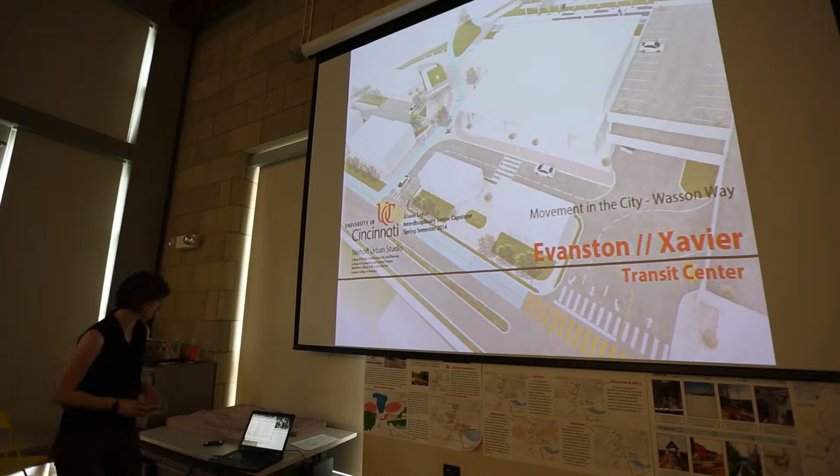So the first diagrams are just the context, which we've already pretty much gone over, but we're in the farthest west portion of Wasson Way, right next to Xavier, north of 71.

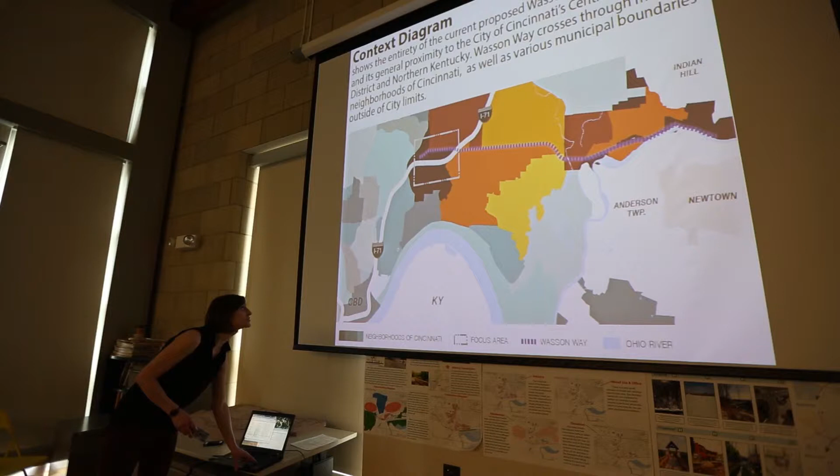Zooming in, Wasson Way's rail corridor actually also intersects with another rail corridor that runs north-south and along Dana Avenue, intersecting with Montgomery.

As far as the framework, this shows again the site we've already heard presentations on, and then the site I'm focusing on. This shows our collective ideas on where the transit center and stations should be placed, with a stop here to the eastern end, and also at the intersection of Wasson Way and the other rail corridor, which is also the proposed I-71 light rail project.

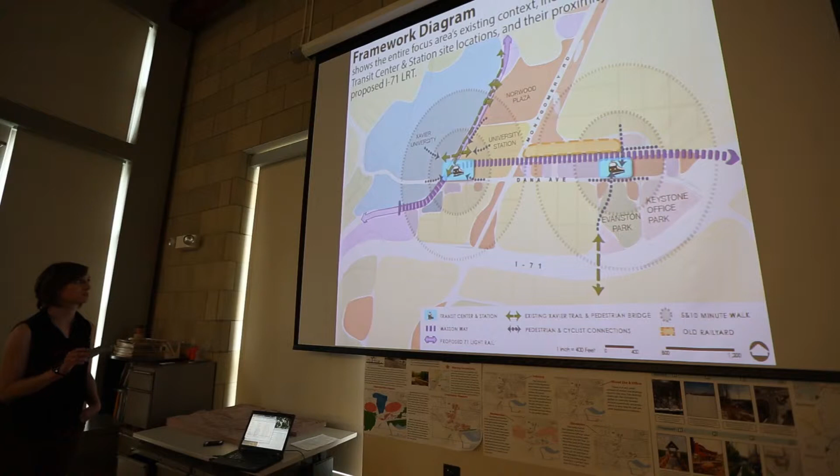Currently on the site, Xavier has built trails that serve as a feeder to the site, along with Dana Avenue directly to the south. The site is bordered by University Station, a mixed-use development currently under construction, and I'll give more details on that. Xavier University borders it on the other side.

This is an existing conditions map, more zoomed in on the proposed site. As you can see, again, Xavier and the trails border the left of the site, along with University Station.

This is the full build-out plan that's currently in just phase 1 of construction. Directly next to the site is a planned office development with below-grade parking, structured parking, and a Xavier Recreation Center to the north. Also showing in this map are the existing bus lines.

The BRT is planned, already running through Montgomery north-south, as well as some of the more major bus lines. The thicker and darker the line, the more frequently the bus comes and the more popular it is.

So you can see the 4 and 51, and then also the buses that run east-west to the south of the site. One of the main bus stops is right here on the corner of Montgomery and Dana, which is a 10-minute walk, but again the BRT would only run through here.

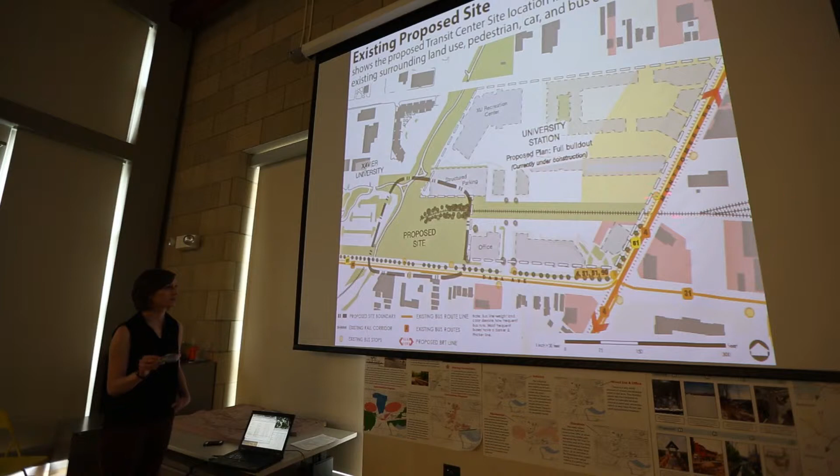And then as you can see, the existing Wasson Way is just the old rail corridor.

As far as some of the precedents before we get into the design, I wanted to focus on utilizing the site to actually incorporate transit, bikes, and pedestrians in a plaza, to create more of a vibrant mixed-use space outside of the actual land uses that will be located there.

This is a picture of, both of these pictures are from Portland's Transit Mall, specifically Urban Plaza, which, as you can see, has light rail running directly through the site and directly into the pedestrian area.

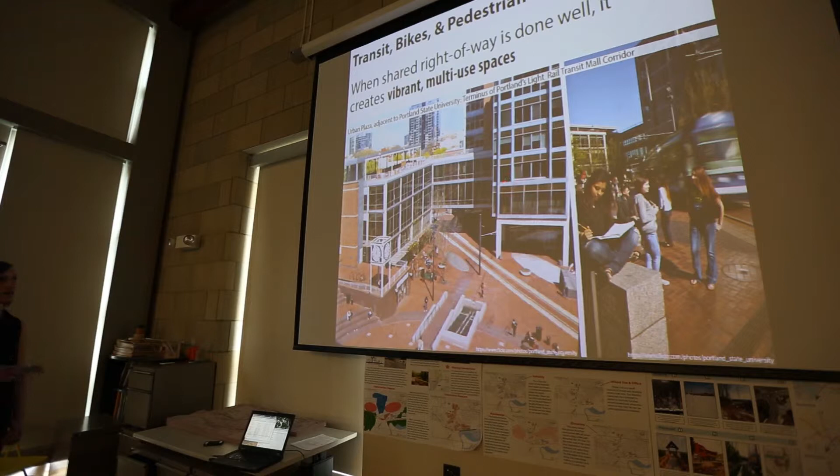These are stepped seating and a waterway, and actually mixed use, some ground floor retail, and Portland State University facilities above, as it borders a campus as well.

And I'll show more photos of this, but as you can see, the pedestrians are pretty much just right in the mix of the transit.

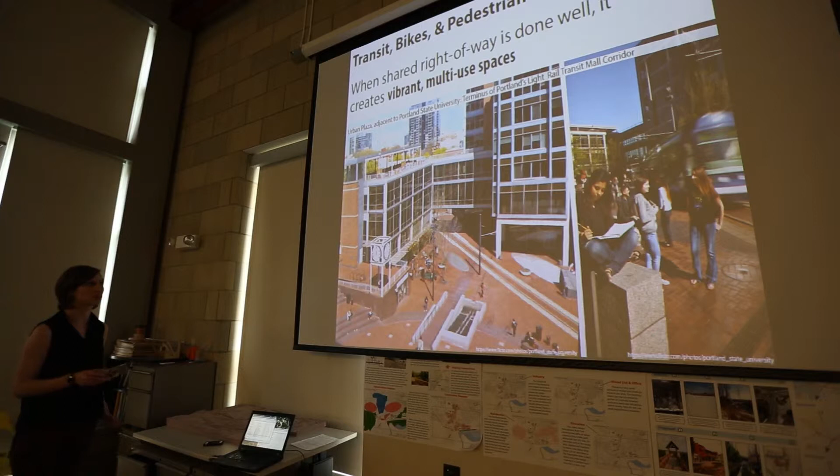These are more pictures of Portland. This is their transit corridor. As you can see, again, the light rail is right there. Low floor trains, you can step right on and off into the public space.

People kind of just cross at will, and a lot of times the paving is the only thing marking the different uses in the space, but everyone is sharing it. Bikes and pedestrians cross the tracks.

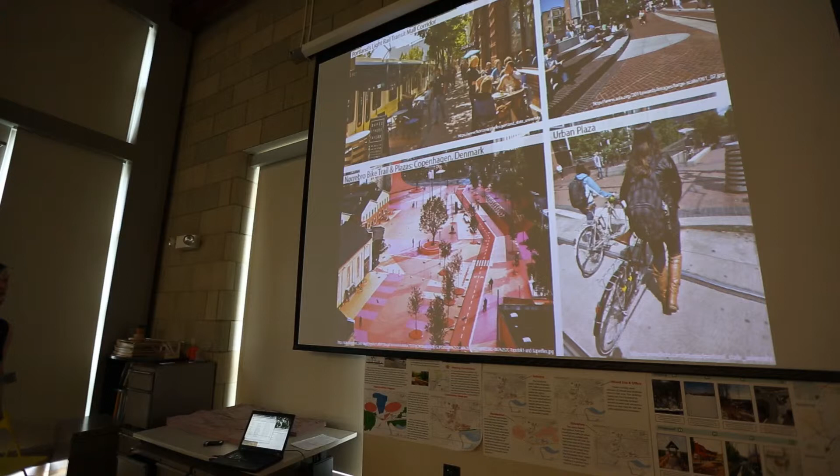And I also included this plaza and bike trail that is part of a series of plaza bike trails that span quite a way in Denmark. Again, pedestrians, bikes, all mixed in, creating a more interesting space rather than segregating all of the uses.

And then I was also wanting to look at the ways in which you support these different uses within the same space, creating opportunities to not only support the transit use and bike use, but also the services that would go along with that.

And a lot of the spaces, including Urban Plaza, actually include bike garages, bike shops, bike shares, all of that.

And then, for the people that aren't using the light rail or the bike facilities, what would make them want to come and stay in these public spaces that are interesting with elements of green? As you can see, Urban Plaza, while it's a great example, is a little outdated as far as a lot of paving material, not as much green.

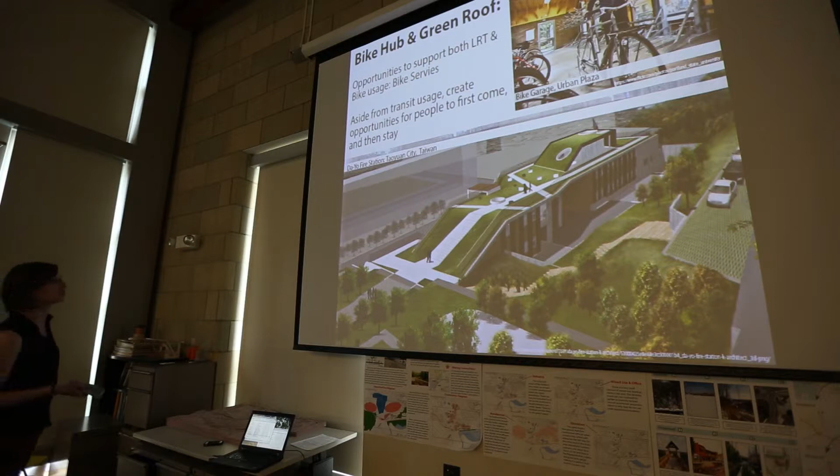I really wanted to incorporate both paving and landscaping with some green elements. This is a case study in Taiwan of a sloped green roof.

As far as the proposed plan, the site would include a mixed-use transit center of 2 floors, which is located here.

Because of the projected use of this area and considering the 71 light rail corridor, we decided to do double tracks, double platform service to this station hub. The ground floor would be most of the transit uses, along with retail flanking both sides.

Parking structure above ground located to the right, and retail on the street frontage. You'll see later there's a retailer here, one more retailer back here, and then an actual bike hub facility with a sloped green roof atop of it.

In the middle of the site is the pedestrian plaza area between the bike hub and the transit center. The bike trail runs with the tracks through the eastern sites already presented, and then is rerouted down Montgomery to Dana Avenue to fit around the site, since there wasn't enough space with the double tracks.

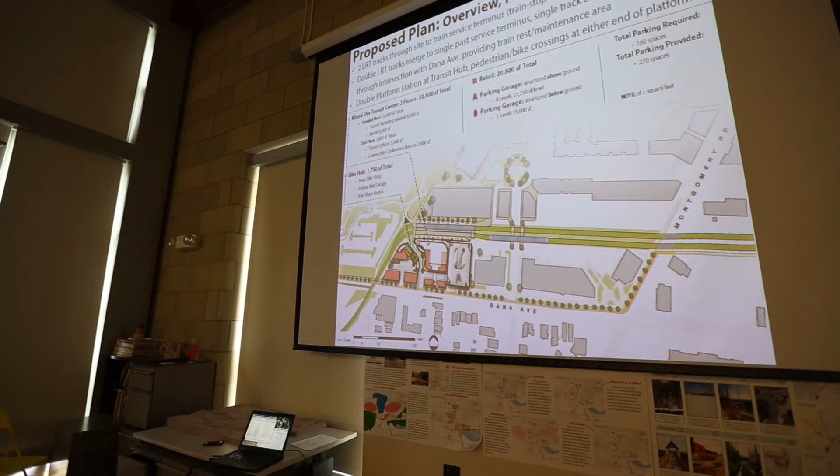As far as the bike hub, that would include a basic bike shop, maintenance, an actual indoor bike garage for parking, as well as bike parking on the outside. Bike share rental would be ideal given the large populations nearby that might not have bikes, and the access to the bike trail all the way out east.

I chose to route the bike trail, not only rerouting it along Dana, but also bringing it up through the plaza, similar to the case studies I just discussed.

This is a section of the bike route along Dana right here. There's plenty of room, given the width of Dana, for a buffered bike trail separated by the trees in green from the pedestrians, and also separated from the traffic with bollards or what have you.

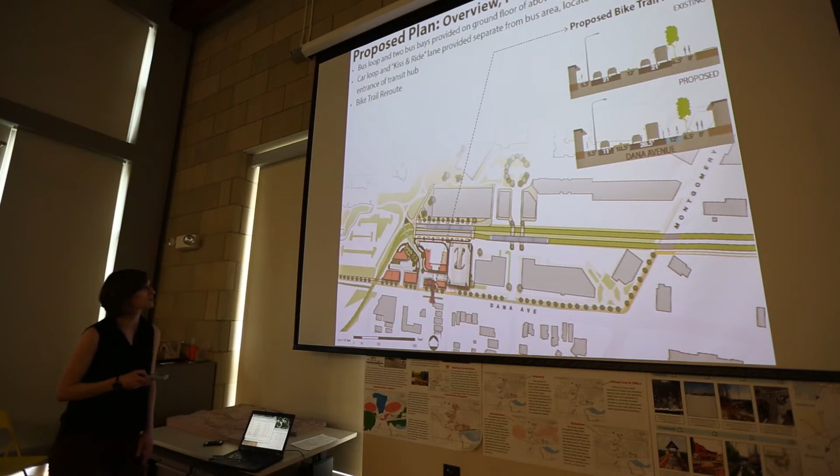We also have some planned below ground parking underneath this site to accommodate not only the retailers and the uses of the transit station, but also a little extra space for anyone who would want to park and ride.

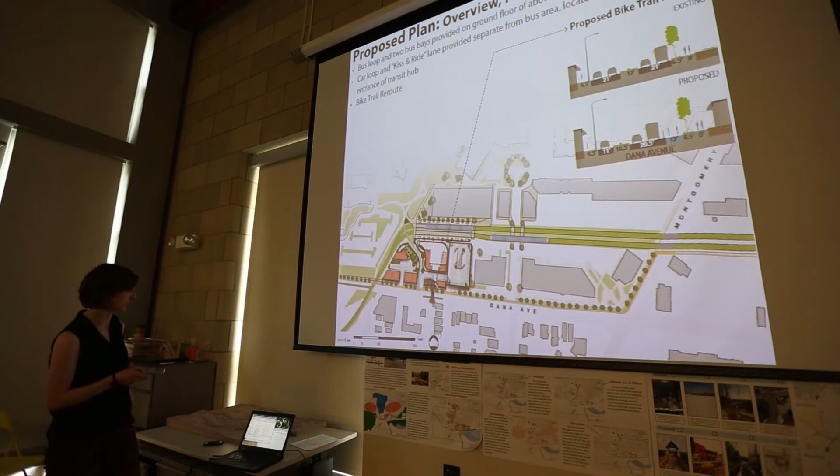These are some zoomed in views of the proposed site, both overview and ground floor view.

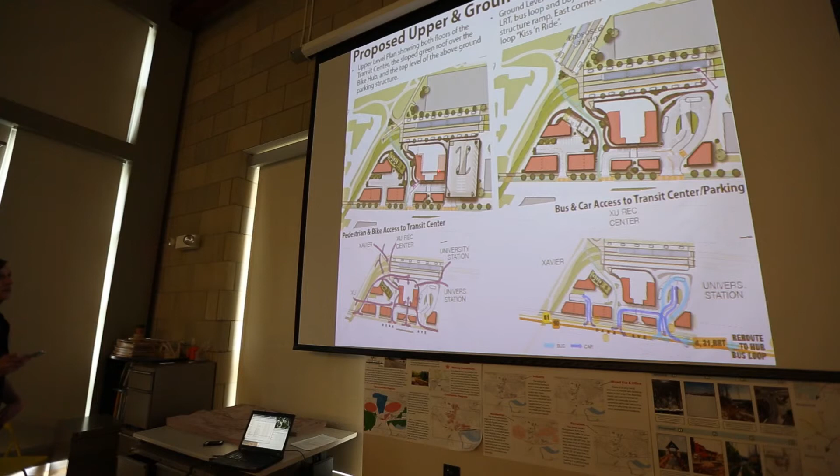As you can see, the mixed use hub shows the ground floor retail transit, and the upper floors would be used for the ticketing offices and community conference rooms. And again, you'll see the sloped green roof atop the bike hub.

In the ground floor view, you'll get a better idea underneath on the ground floor of the parking structure, and the retailer in the corner.

We've also provided for a bus loop to reroute the BRT and the major bus lines that don't already go east-west through this line, through the loop, and back on their routes to provide direct service to the hub.

We've also provided for a separated car loop, including a kiss and ride lane for taxis and anyone who's picking someone up, with parking space there that wouldn't interfere with the flow of traffic.

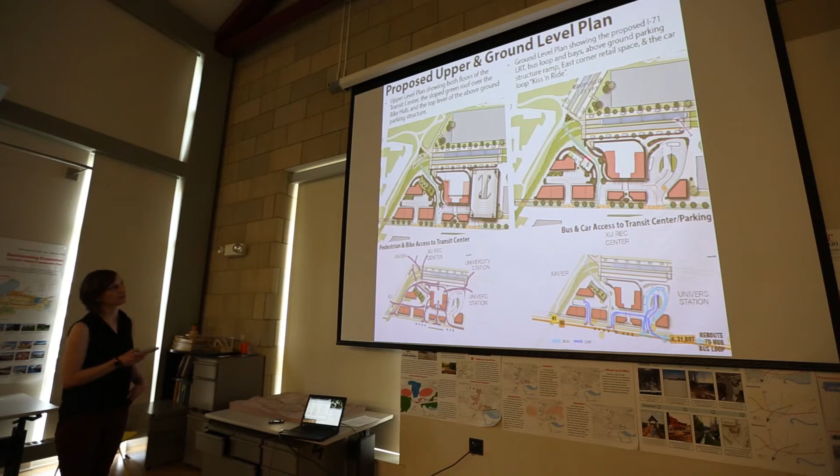And then you see here the bike hub structure underneath the sloped green roof.

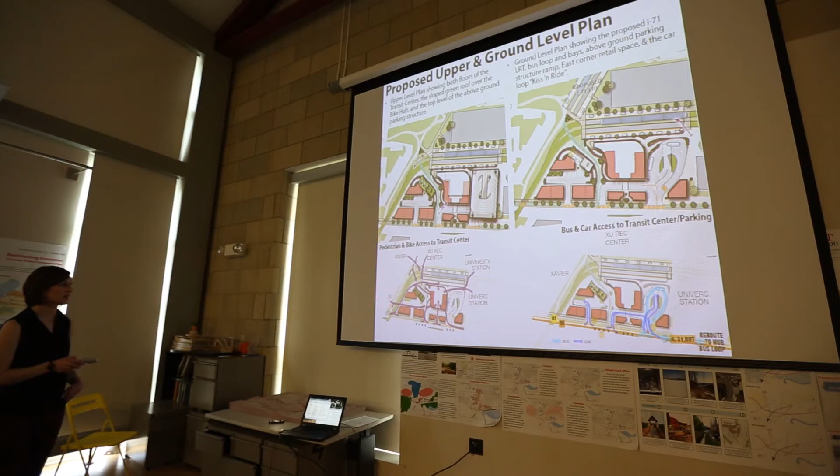These diagrams show the pedestrian and bike access to the transit center. The major approaches coming from University Station to the hub, the major approach from Xavier and the Xavier Rec Center to the hub and pedestrian plaza, and again Xavier through here, and then any foot traffic, bike traffic from the street.

This diagram shows the car and bus flow. Again, the bus loop with bus bays, the car entrance ramp up to the parking, and or the kiss and ride loop for access to the below structured parking.

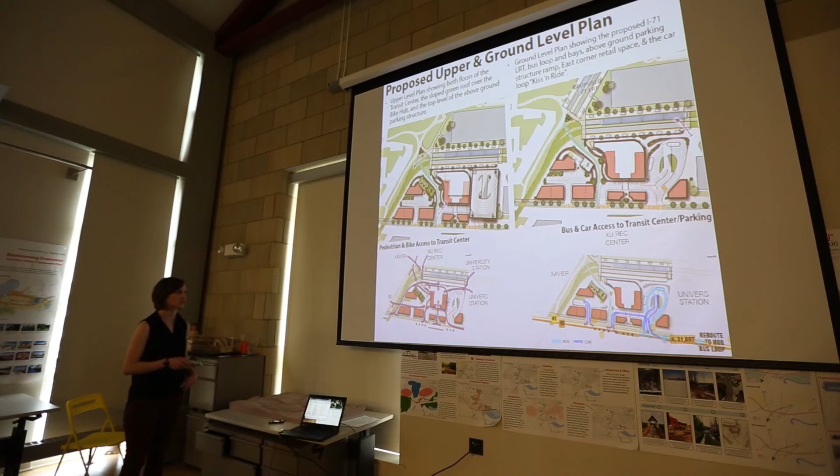This is the parking that would lead to the below ground bike hub parking out front.

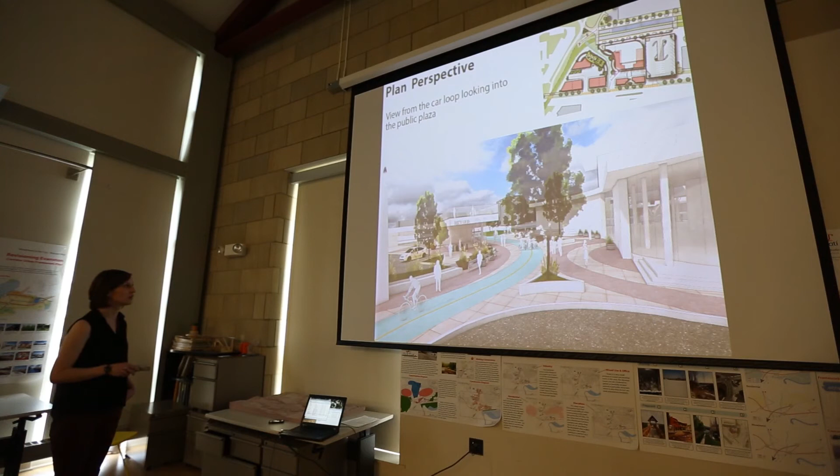Far east retailer, and the public plaza space to the middle. This is just a corner, you'll see later, a kind of stepped plaza area similar to Portland's, located right here. This is another seating area along with the sloped green roof to capture some of the southern light.